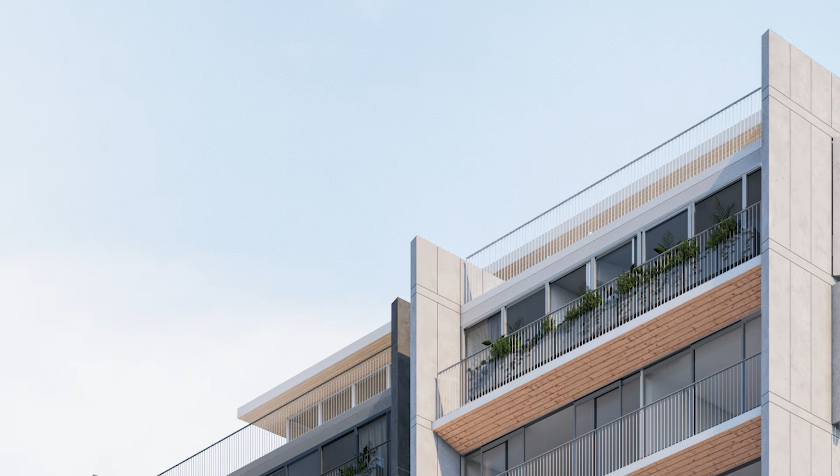This was a professional competition at a national level here in Brazil, organized by a private company that wanted to do real estate development of apartment buildings. Instead of just hiring a firm, they opened it to all firms in Brazil to join. More than 100 offices entered, some quite renowned. They just announced the winners this past Saturday, and in this video I'm going to talk about the boards in general and the actual challenge of this competition.

I'm thinking about making a couple of videos about the competition, one for the boards, which is this one, then one for the renderings, maybe another for the actual design process and how after many tries we finally got to the final design. If you're interested in that, let me know in the comments below.

The competition's main rules - I'll sum up the main things we had to look after so you understand the bigger picture here. I'll also add all the other important links in the video description if you want to go in depth on the official document, look at the boards, and read the project in full, or even see what the prize was, because the first place project is actually going to be built.

First, the site had a complex geometry, and based on the urban parameters we had very little flexibility in terms of locating the constructed mass on the site. Second, the organization wanted the project to maximize the square meters built on the site, which the parameters allowed, close to 10,000 square meters. Third, they also asked the units to be mixed in size, some larger and some smaller, with a set proportion they gave, plus a few other main factors.

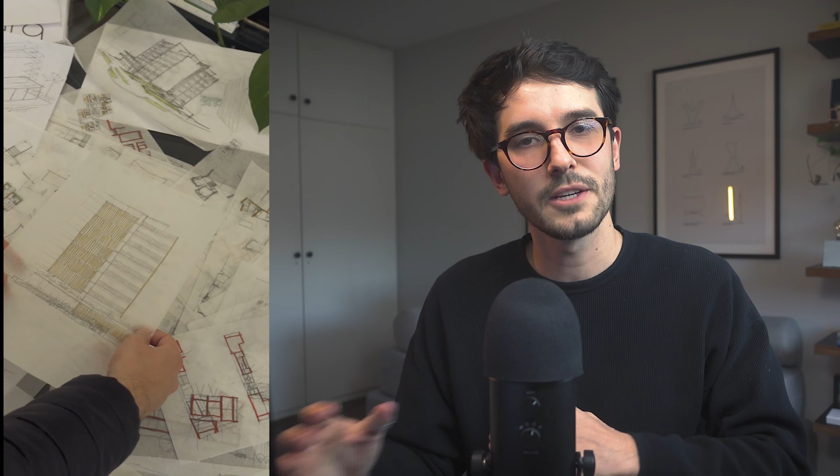The process - if I'm not mistaken, we went through 20 options until settling on this one. Lots of hand sketching to figure out the first steps, then we moved into ArchiCAD to make sure it actually worked. As you can see, our files here tell you the truth about the many tries we did.

This process went back and forth with the aid of physical models as well. Rodrigo is the best at making physical models, all handmade, and he's got the right technique. It definitely requires a lot of patience.

Something we think led us to the podium in this competition was the fact that Ricardo knows a lot about real estate development, and he really insisted on adding as much storefront area as we could. This street has lots of commercial features, and we wanted to explore that within the project. Not only would that turn into income for the condo, lowering monthly fees for residents, but it would also activate its front and be gentle with the city.

It's quite common here in Brazil for condos to just add walls and gates around the site perimeter and call it a day for safety. So with the stores, a private ramped access for residents, and other solutions we added, we integrated the building with its surroundings and solved the security issue.

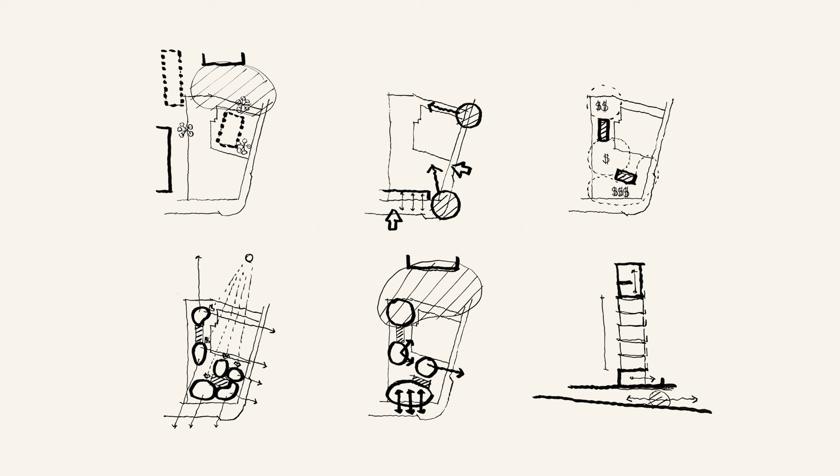Here are a couple of hand-drawn diagrams that we added to the boards summarizing some of the things we thought about during project development: locating what affected the site, proposed accesses, real estate structure, sun and visuals, site occupation, and vertical occupation. Just a note guys, I could talk about this project for an hour, to be honest.

There's a lot I could explain here, but I'm trying to deliver enough so that you understand more or less what this project was and its process, so that you take some value out of this video and hopefully it helps you in future competitions. But now let's talk about the good stuff.

Boards, drawings and images. Board number 1. Unfortunately the organization set the rough layouting of the boards. Personally, I thought that was a major mistake on their part. I understand that if they knew where the information was in every entry, it would facilitate the evaluation process. I do get that, but it feels that a big part of your project in competitions is how you tell the story about it, how you're gonna show the building through drawings, texts, and images, especially in competitions where you cannot really present it in person.

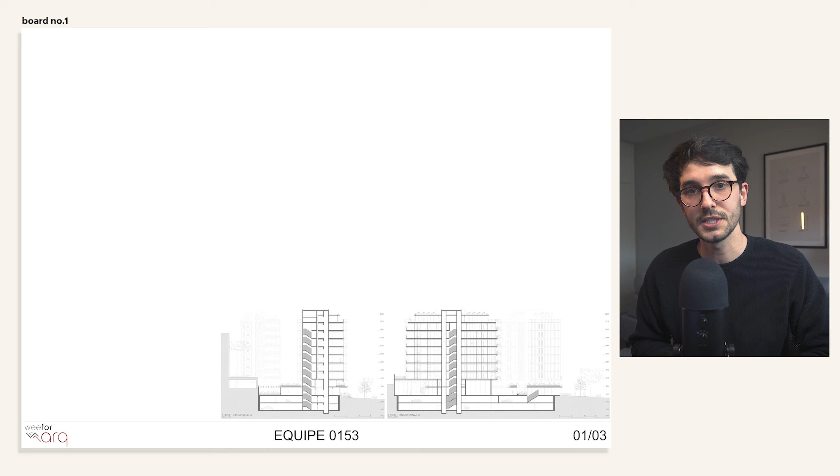So we had 3 A0s in landscape to work with, and in each board, the organization pre-established a set of drawings and information that they wanted there, which also by the scale they asked, left us with very few options of what and where to place other things. For example, they wanted 2 sections right on the first board, plus all the explanation in text and the site plan. That resulted in pretty much this structure that you see here. Not many ways to show different solutions or, for example, bring attention to other parts of the project.

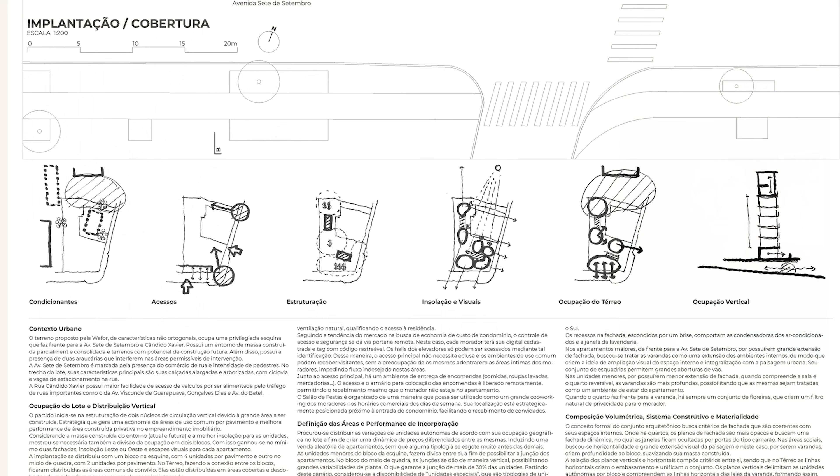A section is too technical. We wanted to place them on the second or even on the third board, honestly. We then managed to also add those conceptual diagrams I showed you before. It helps right off the bat to show our intentions. Then, of course, a big rendering that would be the face of the project.

We thought the street corner angle was the most important. However, it didn't show the back building, so we were kinda in a doubt of which image was actually the main one, and you will see that in board number 2.

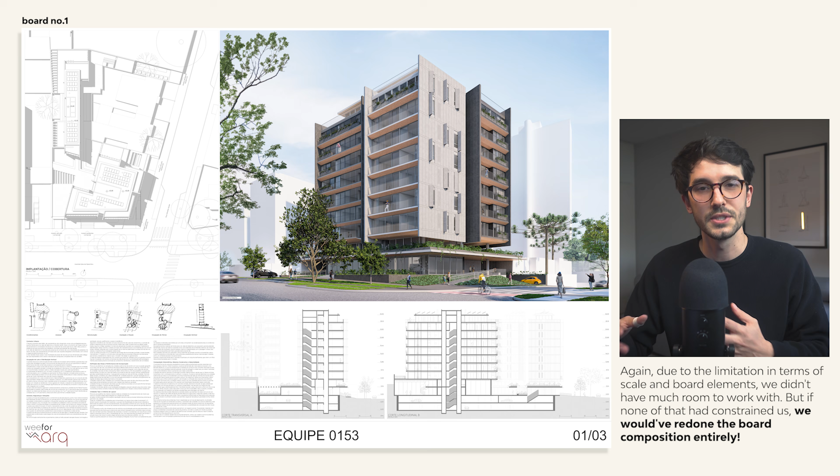The renderings were done using V-Ray. Although it's not the fastest rendering to meet deadlines, it's the one that I'm most used to, and that I know I can achieve the result I want.

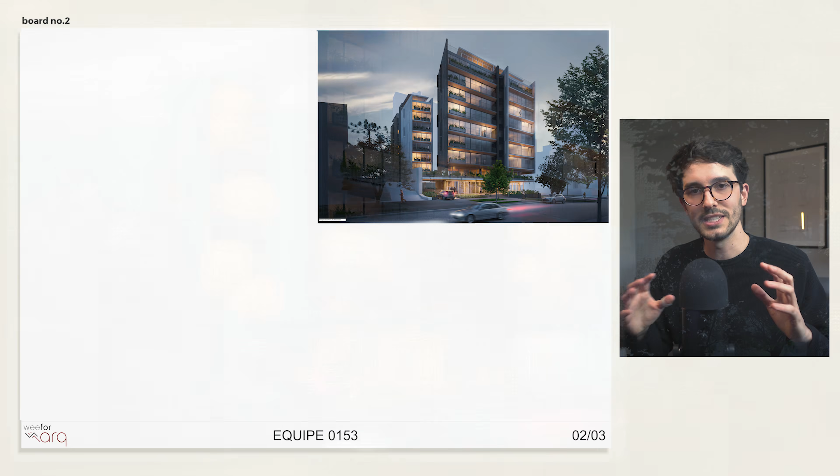Boards, drawings, and images, board number 2. The second board had the other important image that I mentioned. We did both with the same importance, and then just before submitting the work, we then decided which one was gonna go first.

This night scene had a very interesting point of view because, on the project, we decided for a number of reasons that this wall here needed to be slanted. One of these reasons was that the back building would also see and be seen from the street. This rendering shows exactly that. It's quite an interesting relationship that it has created.

The point of view was also fine-tuned to show a slit of the background. It helped with the overall composition a lot. It was too cluttered if this front volume here was overlapping the back one.

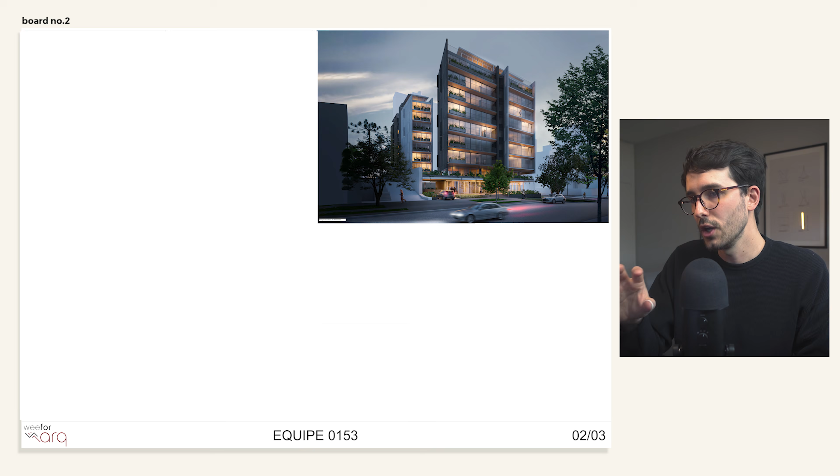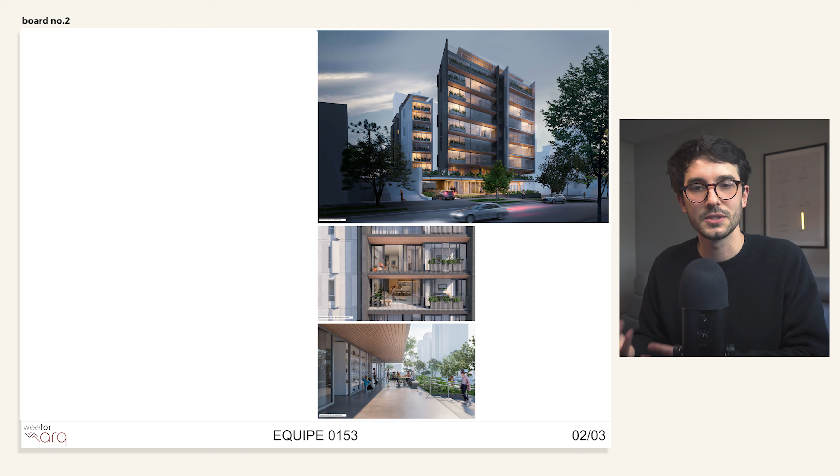The other renderings showed the apartment from an outside view and the commercial sector and its relationship to the street. One decision we took was that due to the lack of board space, and we were not willing to reduce image sizes, we then decided not to do any interior renderings, as our task was not really to do any interior design, but create a building with a broad and open interior space so that residents could explore that by themselves. Also, we didn't actually have time to do it, but if time wasn't an issue, or space either, then I'm sure we would consider actually adding 1 or 2 renderings from the inside.

Technical drawings. As you can see, none of the plans and sections have much to them. The honest answer was that this was quite a huge challenge.

We took too much time trying to figure out how to utilize the plot's maximum construction area, match those unit types that they asked, and solve the public and private flows. The submission was until 6 p.m. on July 1st, and we hit send on the website literally with 15 minutes left.

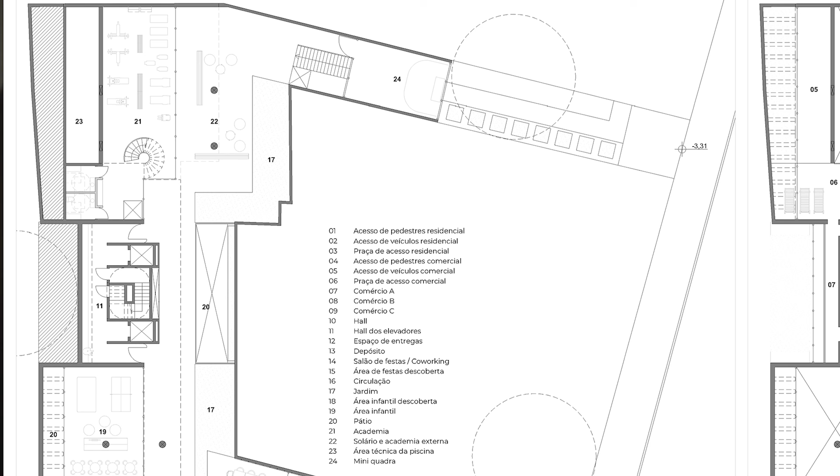Sometimes you gotta take the production schedule into account. Luckily, both Bruno and Rodrigo are really masters at ArchiCAD and they moved fast. I do know ArchiCAD, but not on the level that these guys do. They represented it right on ArchiCAD. We really wanted to go further into the representation of these drawings, but we were quite happy that it turned out clean with all the hierarchy and contrast that it needed.

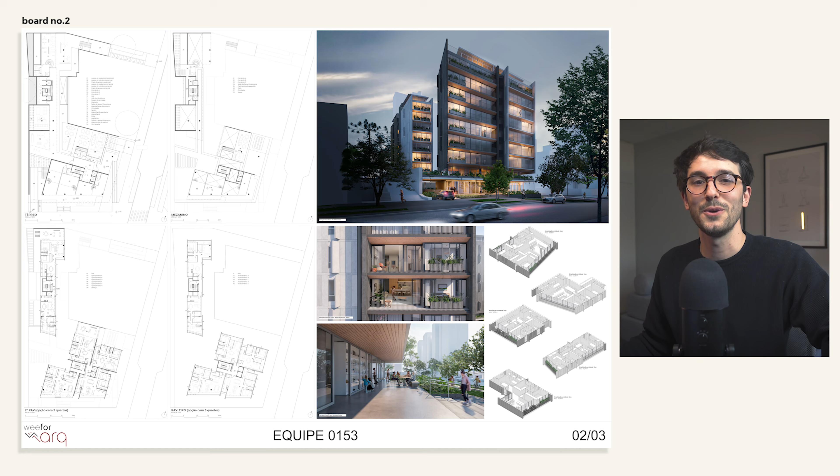Now, these isometrics here, I did not know how to organize them on the board. I had only this little space here and half an hour left, so I just threw them on the board and called it a day. They represent each unit type required by the organization. Just don't look at them too much - I'll totally rethink all the positioning if I had time for sure.

Boards, drawings, and images, board number 3. Okay, the final board. Here we planned this huge aerial diagram. It's in isometric view as well. We felt that none of the images or drawings you could really feel the built mass.

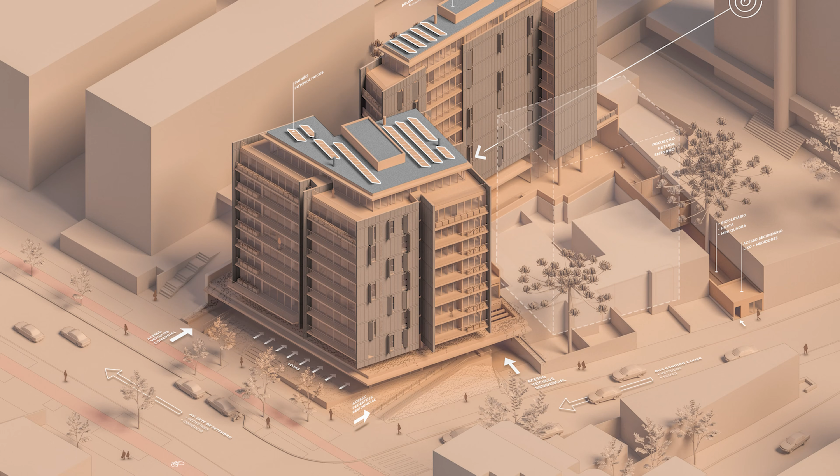This is to show that, plus indicate all the solutions and other things we took into account when designing the building. Mainly accesses, the future possible neighbor here, this tree species here that is protected by the city urban department, and we cannot build anything within a radius of 5 meters. So we showed that we also understood this law.

And here on this diagram, we also showed that we used this weird site limb to solve the trash and secondary stuff, show that there is an option to add solar panels, overall really to understand the real estate development as a whole and see how one thing interacts with the other.

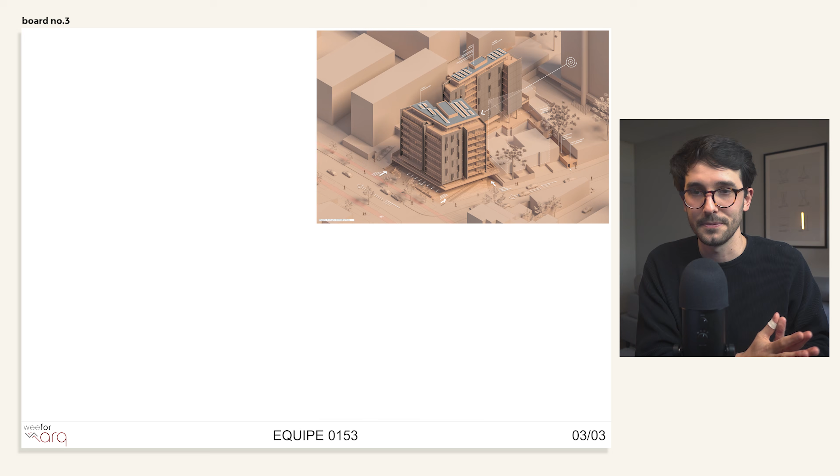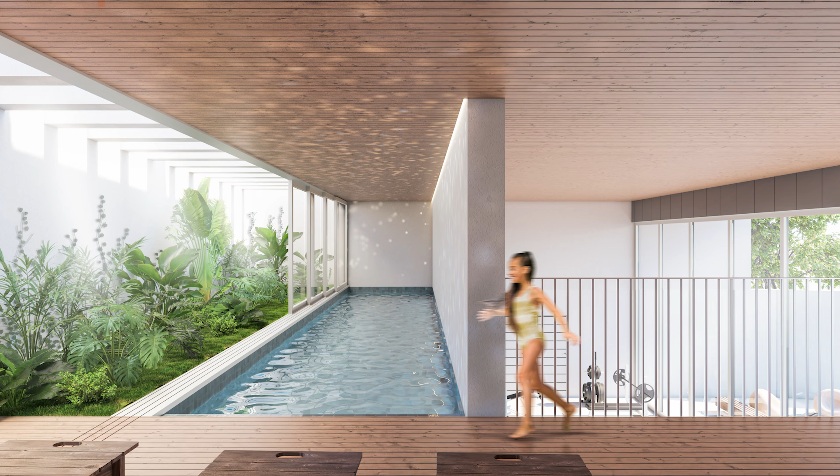Then more renderings, and we had a theme for each board. The second board had exterior solutions, facade and stores, and this third one had common areas, the pool and the co-working slash party venue, barbecue space.

I was so excited to finally share this with you. As I said, we submitted the work back on July 1st. Can you believe it? Almost 2 months of waiting?